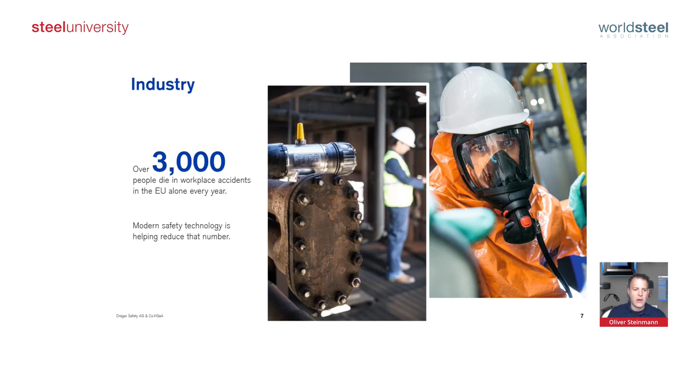16,000 employees currently, and as I said, we have a strong focus on sales, service, consultancy, and that's why up to 60% of all those people are related to those functions. So what is motivating us day by day? It's a very sad fact that every year 3,000 people are dying in workplace accidents, only in Europe. And we are sure that modern safety technology will help to reduce this number, and that's our big mission, to help our customers to gain the Vision Zero goal that might be also very present in your company.

A bit more in detail what is behind. So some of you will know us mainly from this part of our portfolio. For example, the main application is to detect CO2 in steel applications with mobile devices or fixed gas detection systems. But you will perhaps also have some breathing devices from Draeger, from an FFP mask to SCBA for fire brigades, airline systems, and also a very important part: if you are detecting dangerous gases, there might also be a need to have a closer look at safety equipment.

Some additional portfolio parts, body and head protection, and as a company having a focus on personal protective equipment, we also provide the technique you need for maintenance and repair. It's getting more and more important, the software solutions related to all our products. And of course, as I said, it's not only the technical device we are focusing on, it's also a huge offering of services for different situations, for example, for shutdowns that our customers are realizing. We are helping with rental products, even with the safety stuff we bring in to make the shutdown a safe one. And the training part, and that's also why we are here today.

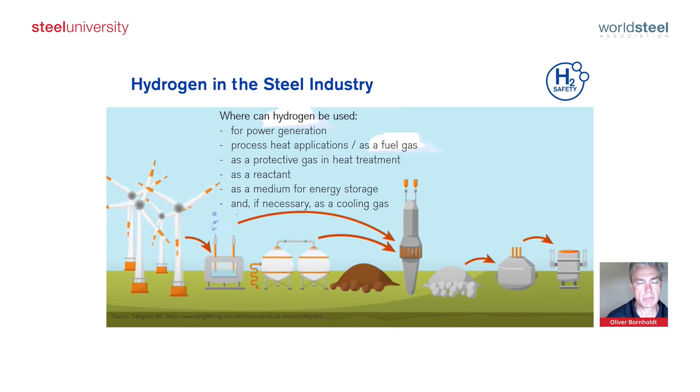Yeah, but where to start first? Hydrogen in the steel industry, we've heard this a bit already, also from Stefano. I will not deep dive into this because this is known to you, but this is exactly where this whole thing starts. And that means really talking about some properties. Why is this so important? You have to know the stuff that you are using because this leads to some challenges and some behaviors.

So let's be aware. Seeing here hydrogen, and we talk about the density, it's really 14 times lower than air. Also, if we talk about outdoor application, that means something. It has to do with a mixture as well, and with air dynamics. So that means, and we come later to this, how gases are dispersed in an environment. Also, if it's even outdoor, we have very hot environments, and the dynamics could be quite complicated. That means you need models that really reflect these kinds of properties as well.

Next thing is for sure molecule size. What does that mean? Comparing, for example, hydrogen to methane, that means here natural gas, it's roughly 4 times lower. When we talk about embrittlement, we talk about leakages, we talk about sealings. So this is controllable, but at least you have to know that it's not a low-hanging fruit, just using another gas and then assuming everything will be good. So it needs to be controlled.

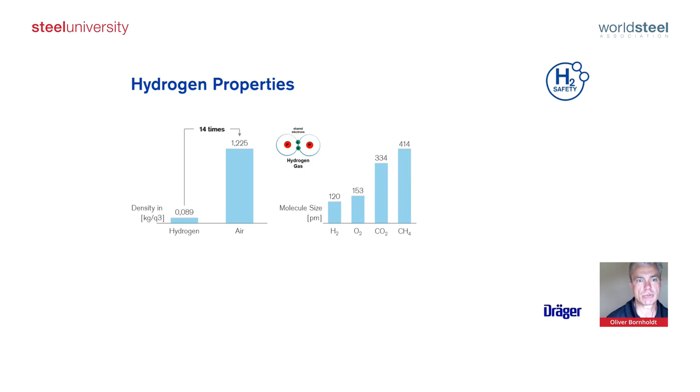A very important fact is the very, very low ignition energy. If you see this here, so we've talked about this. That means it's 15 times lower compared to methane. And then we need to take into consideration ignition sources. And we come to this, the range, really the flammability limit, where a hydrogen mixture, volume by air, from 4 to 75%, is explosive.

And if it comes to that, the burning velocity is a lot higher. So that means a possible damage, which depends also on the volume, could be higher due to the speed of such a flame or such an explosion. Just to keep this in mind, there are some other specialties as well, especially for hydrogen, but I will come later to this.

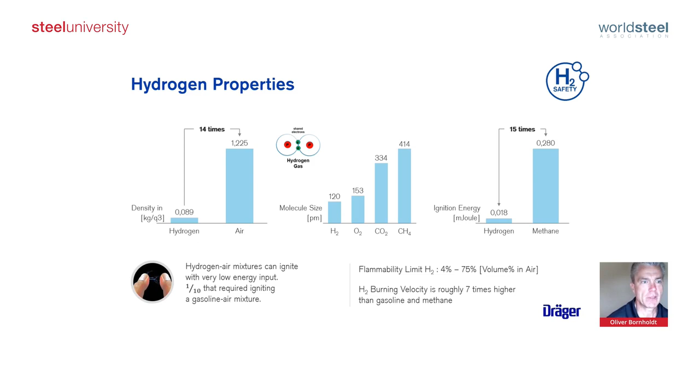We have here some other properties as well, just an overview. When we talk about ignition energy compared to flame temperature, hydrogen is a very special gas. 99.9%, the most important gas in the universe. Also the easiest one. It's just one electron, one proton, but it's very special. It's like a diva in the universe. We see here really the highest flame, and the flame is not even visible. We come to that, and the ignition energy is very, very low.

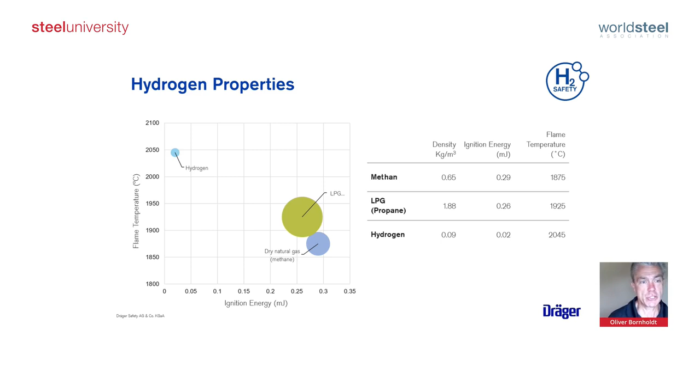Another important fact is gas dispersion. This looks quite complicated, but it's not. As you can see here, the explosive atmosphere in LEL, lower explosion limit. So that means here 4 volume percent, and then going up. So from 4 volume percent, this is the LEL.

And when we look here, and this is a study that was done a couple of years ago, we see here a height from 0, ground, to 2.4, but this could count for other environments as well. It doesn't have to be indoors. That could be something on top of it, that could be a tank, that could be something else. You see here the behavior from this reddish to methane, that really quite fast you will come to an explosive atmosphere. So that means early detection is even more important, especially here for hydrogen compared to other gases.

Modeling can be done. So really gas dispersion analysis is something that we are doing as well for some applications, really taking into consideration what is your environment, what are your dynamics, what kind of heat sources you have, wind directions or whatever, so that at least you get a better understanding of what could be possible in terms of leakage.

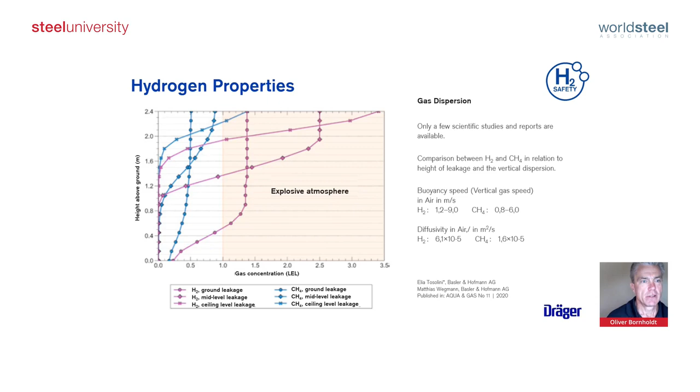Having said this, I would like to hand back to my colleague, really taking the properties into consideration and then talking about some safety challenges that will come with it.

Yes, thank you, Oliver. As we are now aware of some specialties of hydrogen, and I like the picture of the diva, we now take a step forward to the safety challenges resulting from it. And to underline it, from our perspective, hydrogen is not an unsafe gas, but you just have to be aware of the challenges.

So coming to the first point, here we would like to underline that, of course, hydrogen has been part of industrial production processes for many years now. But now during the energy transition, it comes more and more into new applications. And there are two aspects. First of all, people tend to mistrust hydrogen if it is new. That's why knowledge is necessary to increase the acceptance of the people now working in hydrogen applications, because everybody might have the picture of the Hindenburg Zeppelin in mind and the big explosion related to it. That picture is in the minds of a lot of people, and that has to be changed.

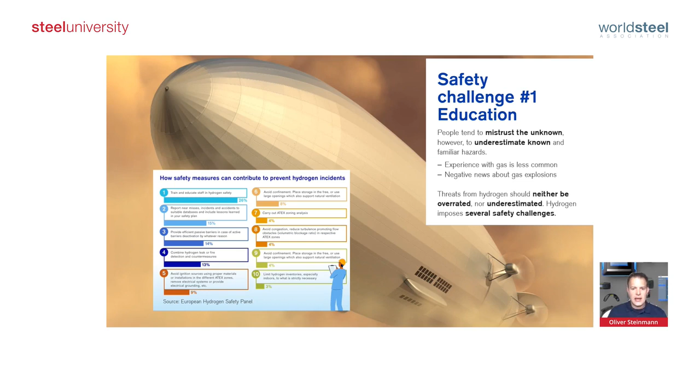Coming to the second point, it's permeation. Here we come back to the property Oliver was talking about, and Stefano as well. It's about the small size of the hydrogen molecule. That's why hydrogen tends to permeate through materials, and under special conditions, as Stefano already explained, there might be embrittlement of the material. But hydrogen has been transported and used for decades now. So it's more a question of the right choice, handling, and maintenance.

And that's the part Draeger is also very aware of, because one of the first inventions in the early foundation time, 1889, was a hydrogen oxygen machine. So, experience for many years now.

Coming to a point very close to the last one, it's leakages. This is due to the small molecule size and the low viscosity. A very good point is that hydrogen is not toxic, but nevertheless very explosive, and that's why maintenance and plant inspection are very important. Here you will need gas and leak detection technology because, and that's a part which will come up in a second, we can't smell hydrogen.

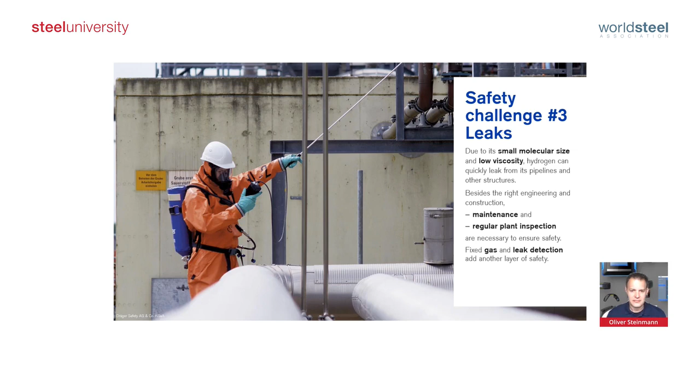Safety challenge four, CO alarms, and CO is a very common gas in steel applications. As we already heard today, its importance will decrease, but nevertheless, I guess CO will still be present in steel applications in the future. But the sensors currently used to measure CO and to alarm people in high CO concentrations have a cross sensitivity with hydrogen, and this may lead to false CO alarms. That's why it is crucial to use the right sensor technologies, because there are sensors with hydrogen compensation, but this has to be considered when you are dealing with hydrogen and CO in your application.

Safety challenge number 5, gas pockets. We are aware of the low density of hydrogen, and hydrogen is of course less dense than air, so it will tend to rise. For outdoor applications, that might not be so critical, even though you also have to consider some outdoor weather conditions which can cause issues, but mainly indoors there might be the risk of gas pockets. For example, in compressor rooms, filling stations, electrolyzers, and here it's very important to know where to place sensors, to take the streams into consideration, and you might also need some ventilation. Anyway, before entering a room, you have to make sure that the concentration of hydrogen is below the lower explosion limit, and that's an important part.

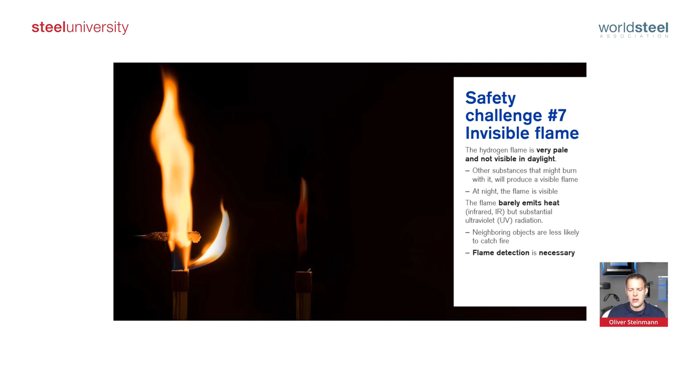Number 8, and this is also related to sensor technology, because in many cases the technology of infrared is used to detect gases, to get aware of explosive atmosphere. And this is an issue for hydrogen. Because of its properties, it is invisible for these sensor technologies, and that's why here you have to be aware of this fact and should rather go to catalytic sensors instead. If you have a methane blend, you also have to take some special things into consideration. But yeah, that's a fact. Hydrogen is invisible for infrared sensor technology.

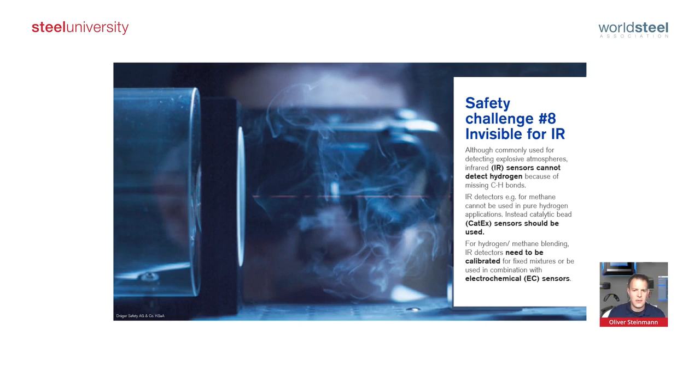Yes, a big threat is Ex protection, because you have to be aware that the energy to ignite hydrogen is 14 times lower than methane, as Oliver already showed in his part. And that's why you have to take care about Ex protection. That would mean every device you are using, every material must be suitable, must be certified, depending on the different Ex areas. We will also tackle this topic in a moment. And to point it out, the classification tends to get stricter here.

You will also have some discussion perhaps with your insurance company, who will also have some questions about your safety plan getting into hydrogen application, and also public authorities will want to have a clear safety plan, talking about operating licenses and so on.

Yeah, last but not least, safety challenge number 10, it's about ignition. And here you have to be aware that under certain circumstances, hydrogen might self-ignite. This is also relevant for high pressure applications, but nevertheless, as I already said, the energy you need to ignite hydrogen is low, and perhaps electrostatic discharge is already enough to ignite hydrogen and to cause an explosion here. Here, the solution is, of course, flame detection on the one hand, but a very powerful technology here is ultrasonic leak detection. And here again, Oliver will come back later to this.

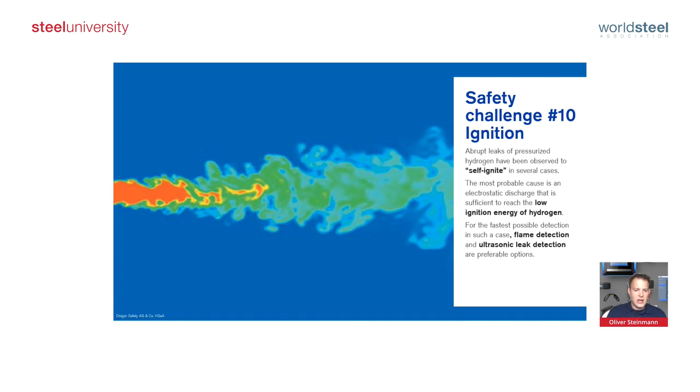Yeah, just to sum it up, hydrogen is entering more and more applications, and it's a special gas. It's not a especially dangerous gas, but it's a special gas, and that's why we would like to underline that knowledge and education is key, and that's why we are happy to be here today and discuss with you later on. And now I would like to hand back over to Oliver, and in the next step, he would like to give some insights into applications from our perspective.

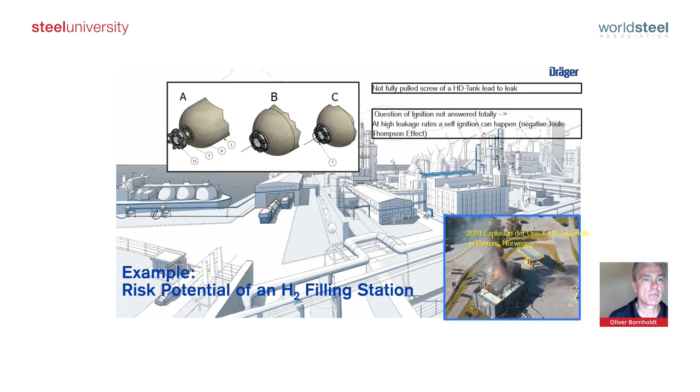You have some other applications that maybe are not interesting for you, but which keep us quite busy. For example, service and maintenance facilities. Here you see buses, or it could be trucks. These are areas that are normally not used to handle hydrogen, and this is the reason why you really have to look into regulations. What is really needed? Some things are still not regulated, so there are a lot of working groups in IEC and in other regulatory groups who are really looking into this and setting this up.

And for sure, you need to talk about trainings and emergency plans as well, but this counts on your side as well. When we talk about a DRI facility, for example, you really need to analyze, and maybe you did this already, where do I have my storage? How do I transport my compressed or even liquefied hydrogen to the place where it's really needed? Is a safety concept really in place if something happens? So you need a proper risk management process in place.

Do I have leak and flame detection in place? And if yes, where? Taking into consideration gas dispersion, what I've mentioned before. Are there ceiling areas? Are there shaded areas? What about wind and maybe heated components? So there, maybe I have really complicated air and gas dynamics. And is the personnel, including contractors, trained in case of an alarm and of an incident?

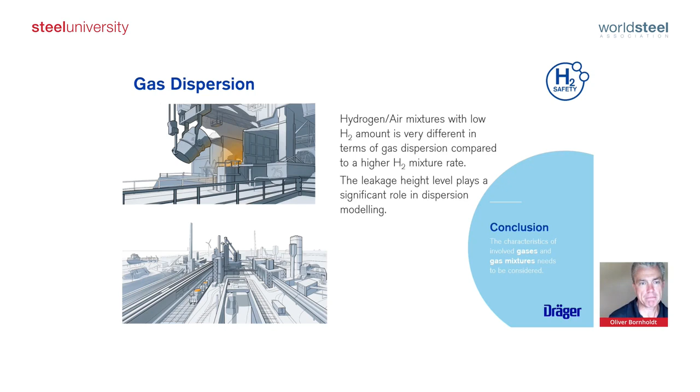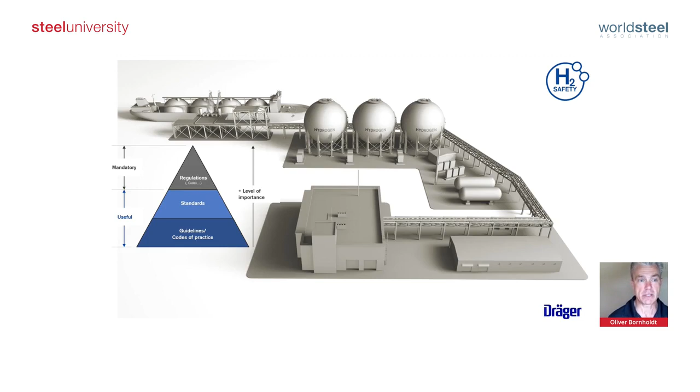Why do we need to do this? Some of these standards have already been available for years, especially when we talk about ATEX directives. There are for sure some minimum requirements for improving safety and health already available. But the hydrogen industrialization brought so many new questions, especially to mandatory IEC and NFPA codes, that it's still under investigation.

Still, we have some pilot plants in place where the outcome will for sure influence these working groups. In some of these working groups we are also active, especially when we talk about gas detection, gas dispersion, safety, and also personal and asset protection.

So this is something where you, or the groups Carlos mentioned, can help you a lot, because this is really a tremendous amount of material. But I think within this big initiative here, we will come closer to that and can help you also with finding the right and correct chapters.

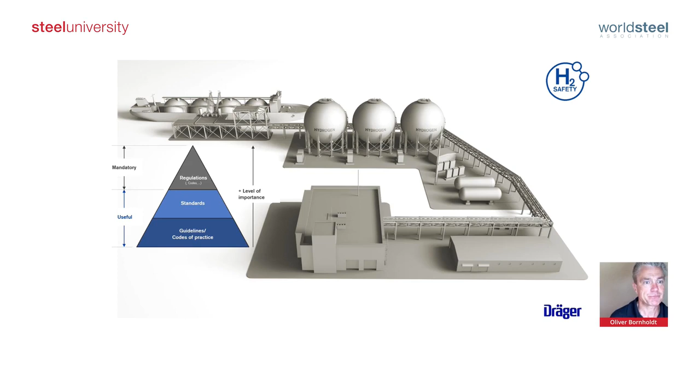Because we all have a duty in our personal lives and our working lives as well to protect health and life. For example, we have really basic laws. We have legislative laws, also from the EU, from other continents. So we are not here only with colleagues from Europe. We have colleagues here from as far as India as well, and some other countries. We really have to look deeper into this. Most of them are really legally binding. So if you're going into operations, you have to have them in place because they are checked.

Some other ones, for sure: ISO norms, technical rules, some principles, sometimes only government action plans or other big plans, like we have Vision Zero, for example. These are state of the art. This will also help you, in terms of what Stefano mentioned, to change and develop your safety culture. And this is especially for hydrogen a very crucial and very important topic.

How can you assess explosion control? It's just an easy example here. Are flammable substances present? If no, then also from the regulatory part, no explosion protection measures are required. You can document this in your risk assessment. If yes, can an explosive atmosphere be created? If no, same answer, then you are safe.

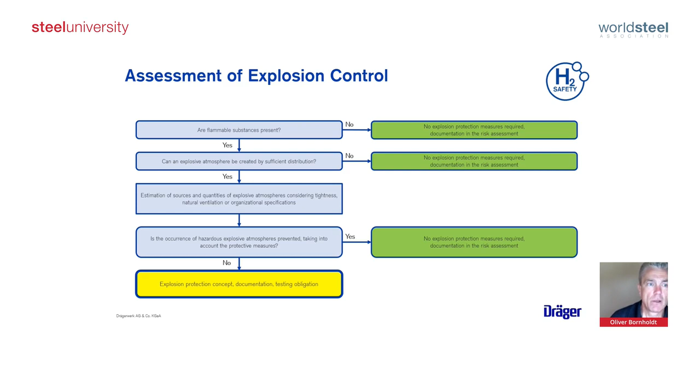Explosion protection, what does that mean? We always talk about the lower explosive limit, the LEL, and an upper explosion limit. We discussed already the ignition temperature and minimum ignition energy. All this information you will find in these ATEX abbreviations used for all components, sensors, or whatever needs to be operated in explosive atmospheres. Maybe you know this already, but here you can find the real specifications for it.

Also, our sensors and the equipment that we are providing are fully ATEX conform, also for hydrogen. So just be careful with it: what kind of gases is it used for, or tested against? This is also quite important here.

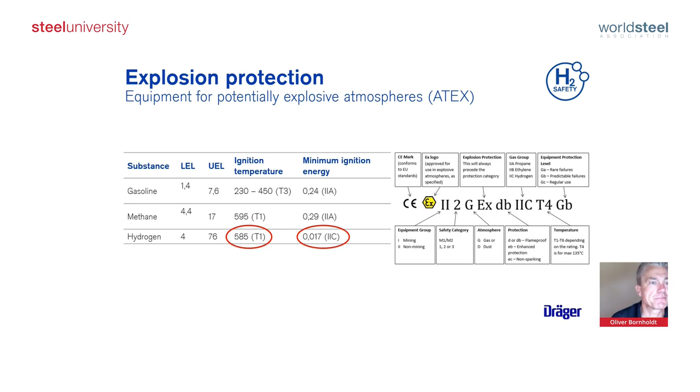What regulations? What is the take-home message? The regulations are really extensive, but as Carlos said, we can guide you through this process, especially through the hydrogen-specific regulations. You definitely, and this is a local task, have to determine the explosion hazard. What can happen? What do I have on site in terms of storage, transport, pipes, compressors? This is maybe new for you, maybe not, but it definitely needs to be documented.

You need a hierarchy of measures: primary, secondary, tertiary. This comes in a couple of minutes. The equipment we've discussed needs to be ATEX certified. You need to document this in a really proper way. Maybe you know this and you're fine with that in terms of occupational safety as well. You need evacuation plans and emergency management, really from the top of your management, so that everyone knows exactly what to do in an urgent or severe situation.

And we touched on this: instruction and training. Education is really a crucial part. We see this in a lot of discussions with customers, starting with some basics, but then really discussing what is really needed. What is gas dispersion? Why is hydrogen maybe a little bit different to handle than other gases? What about gas mixtures, like natural gas and hydrogen? What does that mean in terms of material selection? So there's a lot to learn, a lot to digest, and a lot to document.

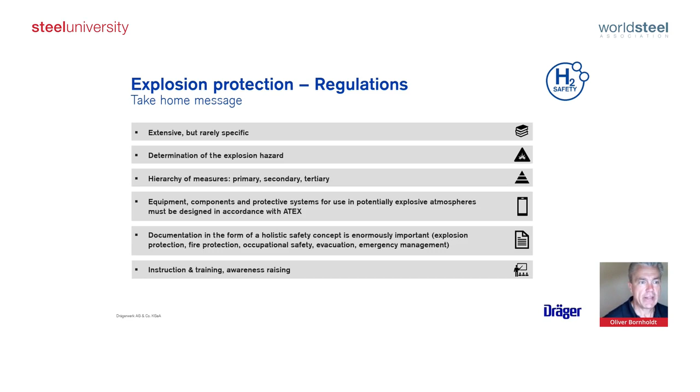As I said, there are three levels of explosion protection. The first level, the so-called primary, is really to prevent an explosive atmosphere. How to do that? To prevent the gases from leaking. So we talk about gas-tight construction. Normally materials, sealings and valves are available for handling this. So this is really not new.

But mainly when we talk about maintenance, this needs to be done for these kinds of installations as well. So here as well, take care of that. Most accidents happened during or after maintenance, or improper maintenance was part of them.

Preventing explosive atmospheres also means you need to take care that you can remove gas quickly if you have a leak. That could be a ventilation system. This could be a gas dispersion analysis, so that you can prove that if you have a leak, it will be under the LEL, the 4 volume percent. So this really needs to be quantified.

Then I would say you are on a safer side, not on the safe side, but on a safer side, in combination with a gas detection device. You can check: here is something, I have a leak, but it's still under control and it's ventilated. Then you can take measures to control this whole situation. And this counts to the primary explosion protection level, gas detection, which is mandatory as well.

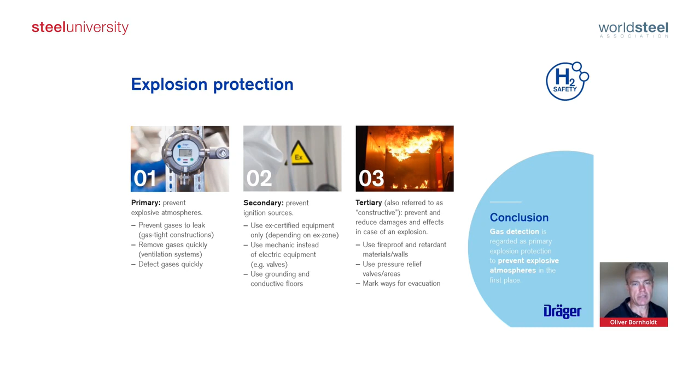Risk management. Maybe you have groups who handle this for you in your company. What needs to be done? You need to identify the risks, analyze them, and evaluate the measures, especially the consequences, including some modes of action. You have an indoor or outdoor leak. This is an example for indoor, but it doesn't matter.

Immediate ignition could happen, then you would have an explosion or a fire. If there's no immediate ignition, what happens then? Two things can happen: hydrogen accumulation above 4 volume percent or below. If it's above, certain things can happen: asphyxiation, potential pressure peaking, or maybe a delayed ignition in a layer. So this can happen for both.

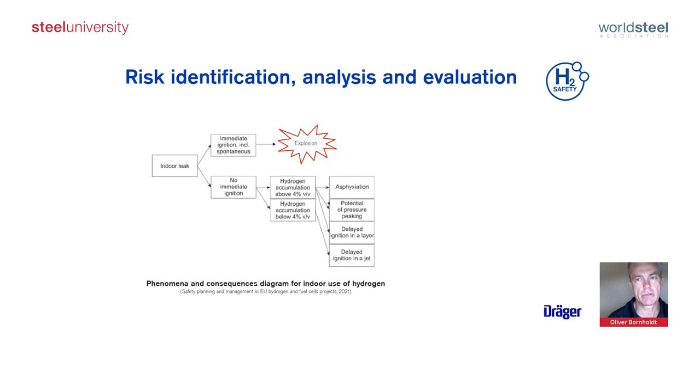So it really depends on: do I have oxygen around and do I have an ignition source? That means you really have to understand the mode of action and the consequences, and this needs to be documented in your risk identification and your risk management process.

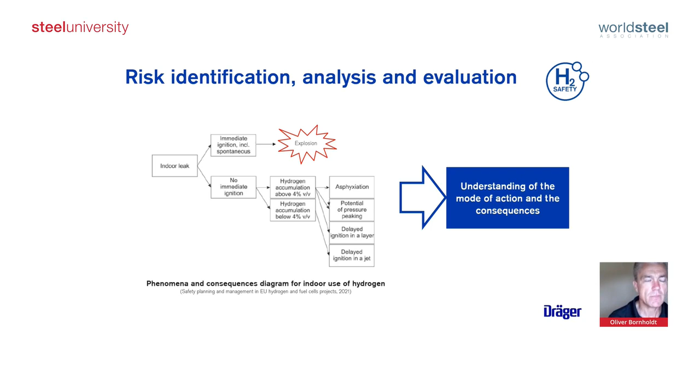What is mostly used to understand this is the hierarchy of controls. First of all, you could eliminate the hazard. Not easy, because you want to use hydrogen. To substitute as well, hydrogen substitution with another gas which maybe has a lower potential of risk, also not possible.

So the next level is engineering control. That means you need to isolate the people from the hazard, and gas detection, plant fire protection, technical safety, ventilation are part of it, and this needs to be documented. The next step is administrative controls, changing the way people work. That means you have a proper safety matrix.

You have to have, for example, emergency stop of electrical equipment, emergency shutdown, permitted activities, or blowing off of hydrogen, or a pressure relief if you have a leak and you have a tank storage somewhere, so that you, in a controlled process, lower the pressure and boil off the hydrogen, blow off the hydrogen.

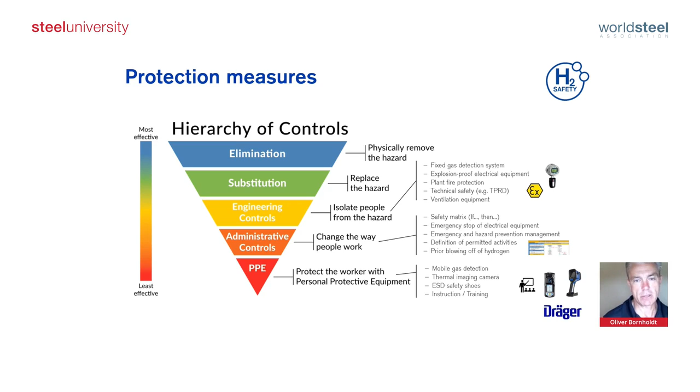Last but not least, PPE, personal protective equipment. When we talk about ESD equipment as well, and instruction and training is part of that.

How does a risk assessment look? What normally needs to be done? You're really looking into your working procedures. You need to document them very carefully. You look at the severity of a damage, what can happen, and what is the probability. You rank them. You look in a kind of matrix, and we use this from time to time, so-called IPL layers, independent protection layers.

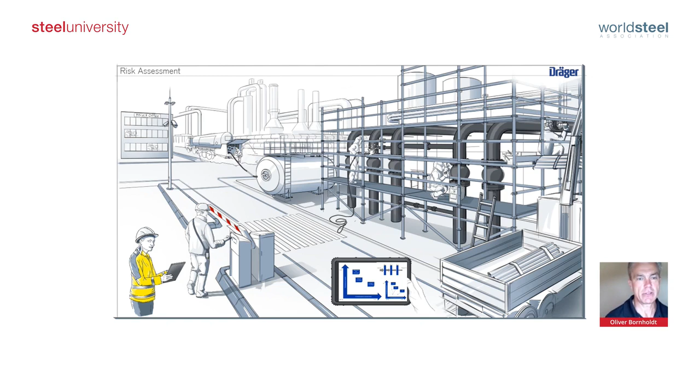And if you have them installed, that could be technical, that could be organizational, you really lower your risk by IPL level. And then at the end, for sure, you have to accept a certain risk, which needs to be documented as well in this assessment. Then for sure, you need to evaluate, you need to validate your controls, and you have to check if your safety measures are really operating in the way that you defined it. This needs to be proved as well.

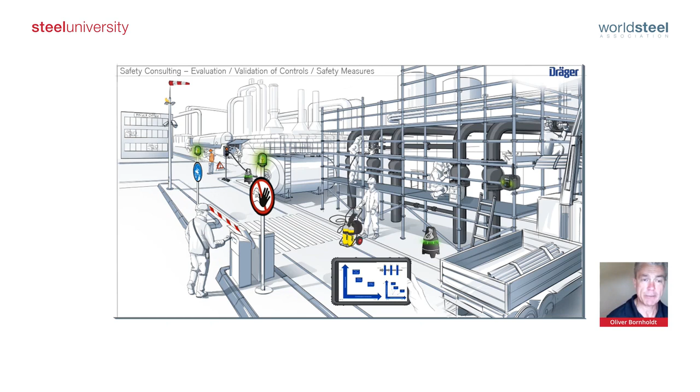And last but not least, education, training. Here, emergency escape training, including all the equipment that you have defined. That could be evacuation of people out of these areas. Management needs to be trained as well in terms of, let's say, escape scenarios, in terms of bigger scenarios, including maybe if you have a local fire protection guard or a public one, so they need to be part of this process as well.

All this can be done in a risk management workshop. So either guys from worldsteel, or maybe we from Draeger, or maybe you have your own guys who can perform these kinds of workshops. We have also specialists who can help you with this. Sometimes it's good to have an external view on this process. We know this as well. Our safety consultants, I know some of them very well. Sometimes I'm traveling with them. They have such a different view on daily life.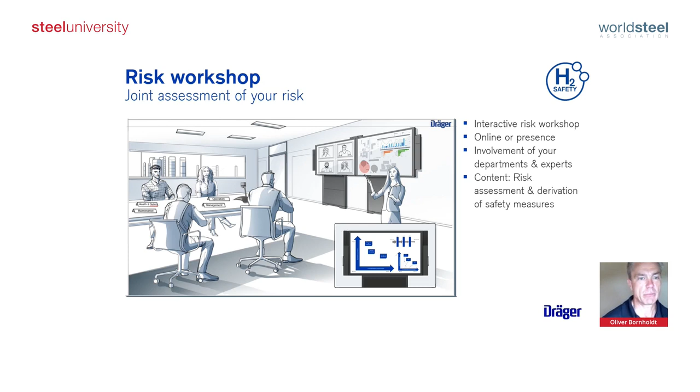Having said this, I will go to the summary here. Safety and emergency management within Dräger safety. So what we are doing, as I said, we do education and exercises as well. We can do risk analysis and define protection goals together with you. Part of this is then really C-level management board, alarm, emergency planning, crisis management, and then the process safety management system.

So conclusion, and this counts for you, you need to have a holistic safety management concept, and this really plays the major role in risk mitigation. Coming now to the primary explosion protection level, and here we talk about some hydrogen detection technologies. Normally I have a kind of comparison when we talk about sensing technologies.

Looking into your face, you have three important senses: your eyes, and you have a point detector as well, your nose. For some gases, it works very well. For example, methane, which normally has some sulfuric odors. It's very sensitive to that. Or you could hear a leak. Unfortunately, our ear is not capable of this, because high pressure leaks from 2 bars and above emit acoustic noise in a range we cannot hear, above 20 kilohertz. Due to that fact, we have to trust technology.

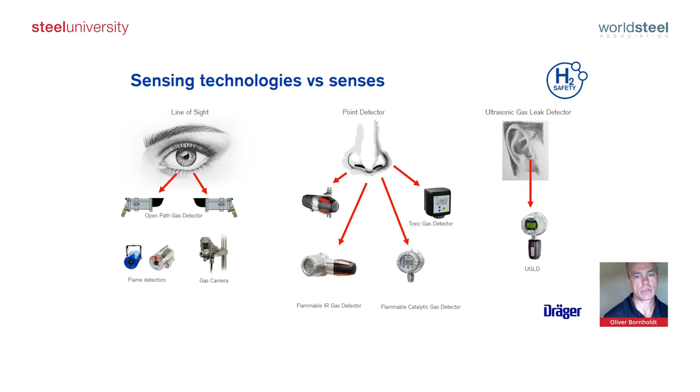That could be an open path gas detector, a flame detector, and a gas camera, which can detect hydrocarbons in general. Point detectors, and we will come to that in a minute, will help you. Or UGLD, ultrasonic gas leak detection, which will hear what is going on in your environment. So why is this so important? We can talk about an event tree for gas release. Starting here on the left, you have a gas release, a leakage.

Two things can happen. I can have an immediate ignition. That can happen either because I have an ignition source, or by self-ignition if it's above 575 degrees Celsius. What happens then? I get a jet fire. If not, if I don't have an immediate ignition, a vapor cloud could form and could ignite.

And for sure here, point and open gas detection plays a major role, really to prevent the ignition and the ignition volume, the so-called LEL, the lower explosion limit. Even better would be if we said, okay, what if I start earlier? So if I have a gas release already, I could hear it. So the gas does not have to come to the sensor.

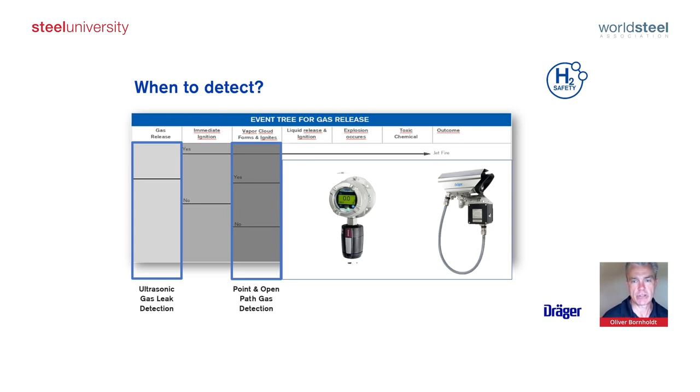Yeah, how will this look? Gas detectors or gas monitors, gas cameras, as I said, are critical components and safety equipment, really used to protect lives and your properties. Using sensor technology, gas detectors will measure and display the concentrations as well. So that means you know exactly and can document, you can have readouts, you can have dashboards where you see, is everything okay?

And then you can also go back in time. Is there a difference between daytimes, over shifts? All these things can happen, and that gives you a lot more information in your operation if something is going on. And as I said, placement of sensors: where, in what application, where is it useful, not to over-specify. What kind of detectors? Is it a point detector? Is it maybe a multi-gas detector? Do I detect not only hydrogen, but maybe other gases as well?

CO plays a major role, and hydrogen in combination with carbon monoxide is a tricky thing, because most gas detection suppliers have difficulties with that due to the cross sensitivity of hydrogen to carbon monoxide. So it could happen that you have a carbon monoxide level and then you get a warning that there is a possible hydrogen leak, or vice versa. So you definitely have to have a sensor that is cross-calibrated and can be used in these environments to avoid these false alarms. Luckily, we have sensors which can be used in these environments and are not cross-sensitive to carbon monoxide and hydrogen.

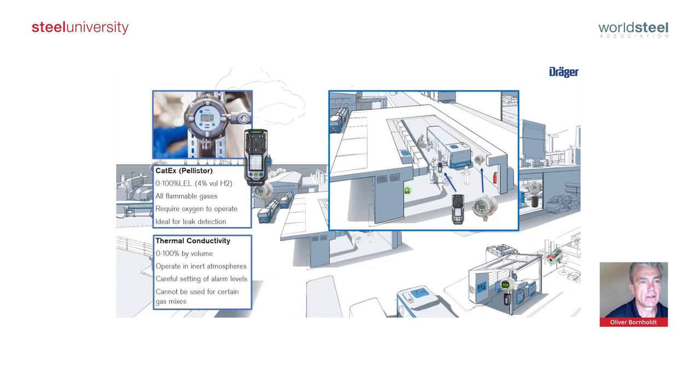Looking deeper into that, electrochemical sensors are another choice. How does that work? An electrochemical sensor reacts to the target gas, for example here hydrogen, using an electrolyte which generates, when it comes into contact with the gas, a current that is proportional to the amount of gas that is detected. This method enables a more sensitive hydrogen gas detection than a pellistor sensor, and it can be used for multiple gases in parallel.

The pro and con of this sensitivity is that an electrochemical sensor can be damaged if exposed to target gas levels exceeding the measurement range. This is so-called toxinization of these sensors. With every plus comes a minus. They are very, very sensitive. It's really for sniffing around, can go very low. But if I had a really high concentration, which normally doesn't happen for hydrogen, either a big leakage or big concentrations around, then it could be critical.

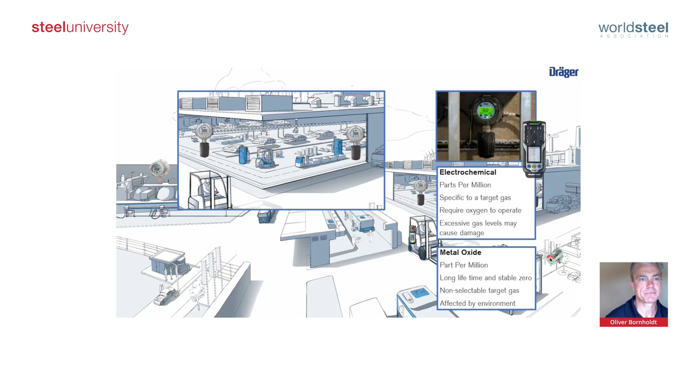Last but not least, talking about flame detection. There are several technologies that can be used. In a flame fueled by a hydrocarbon source, normally carbon dioxide, carbon, water, and heat are emitted. For example, IR. Since a hydrocarbon-based fire is a strong emitter of an infrared spectrum, everyone can feel it with your skin. Single and maybe dual IR detectors are suitable for the detection. However, they rely upon a CO2 spike created by this hydrocarbon fire.

And not all fires are the same. Unfortunately, a hydrogen flame will not emit CO2. So IR flame detection is not suitable here. Then we have ultraviolet. Unlike hydrocarbon flames, hydrogen flames radiate primarily ultraviolet radiation. And you will see them in some water bands, because if you have a hydrogen fire, water will be the result of it.

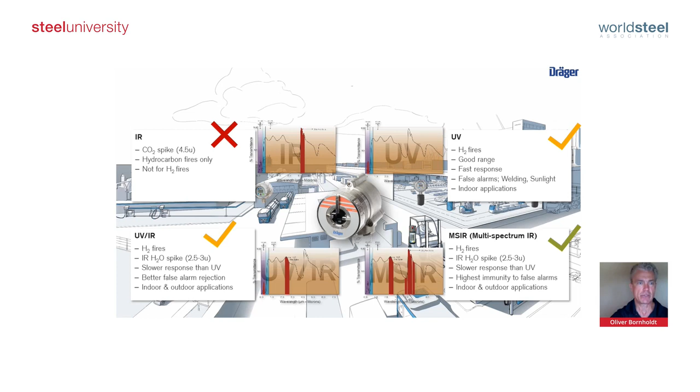Here's one of the best hidden secrets, an ultrasonic gas leak detector. So what does this do? It detects the acoustic emission created by a pressurized gas that expands to a lower pressure. So there's a pressure difference, and this creates a certain sound. An acoustic sensor like a microphone detects the changes and cuts out the background noise. These are mainly used for remote sensing in outdoor environments where weather conditions can easily dissipate escaping gas before it reaches a certain level.

With point gas detectors, which we've discussed already, the gas needs to come to the detector. As we said, with gas dispersion it really depends on where the sensors are placed. In combination with an ultrasonic detector, which hears a leak from 2 bars upwards, that would be the safest way. And we can exclude the environmental noise in your environments as well.

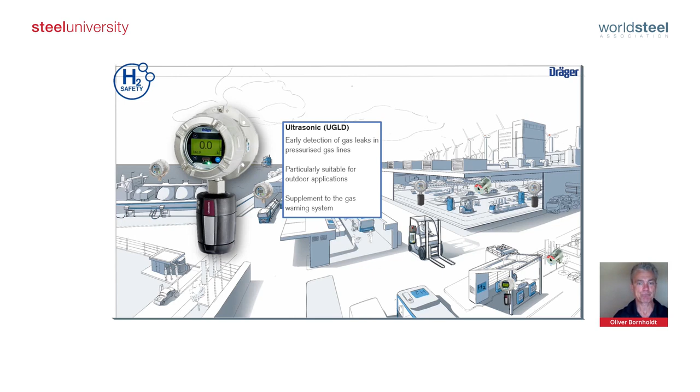So, in conclusion, the right gas detection technology is crucial, especially the placement and what is really needed where. As you can see, that needs some knowledge, and we're happy to discuss later. We can deep dive into each of the technologies, look into applications, and talk about scenarios. This is something we want to discuss within the workshop later, to find out where you currently are in terms of your safety environment.